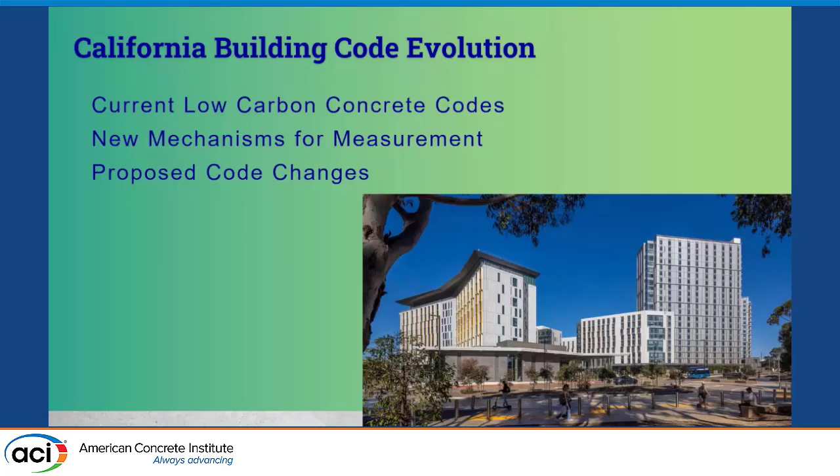It all started a long time ago in 2019 with the Marin County Low Carbon Concrete Code. This was put together by a group of folks up in Marin County and the California Bay Area. They looked at what was being done in their jurisdiction and wanted lower carbon concrete. When this happened, we really thought the sky was falling. We thought this was the end of the California concrete industry. There's no way our industry can live with rules like this.

We went up there and testified, please don't do this. You guys don't understand cement. You don't understand concrete. You don't understand the logistics. They went ahead anyway, and we were really concerned.

So things in this code: they have options to comply with a low carbon limit by limiting the amount of cement in your concrete. You can also comply by submitting an environmental product declaration talking about the GWP in your concrete. You can comply on a mix-by-mix basis, or on a project-wide basis - today we'd call that a carbon budget. They also allow that if you have cement from a plant lower in carbon than the national average, you can scale up the amount of cement you use by that similar ratio.

In the intervening 6 years, I'd say they did everything we would ask anybody to do. I don't know if they knew it at the time - I don't think we knew it at the time - but it actually works really well. The cement limit looks odd; the reason is that in 2019, when they were contemplating this low carbon code, there were no concrete producers in the entire county that had the ability to generate an EPD for concrete. But they said, hey, we want low carbon concrete anyway.

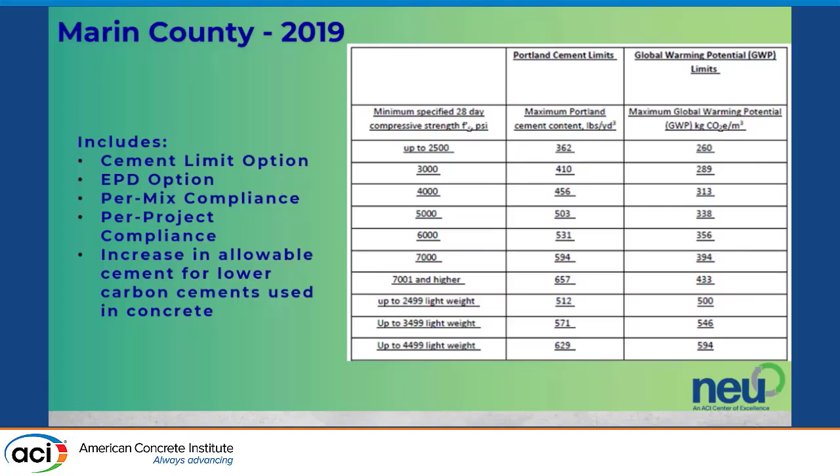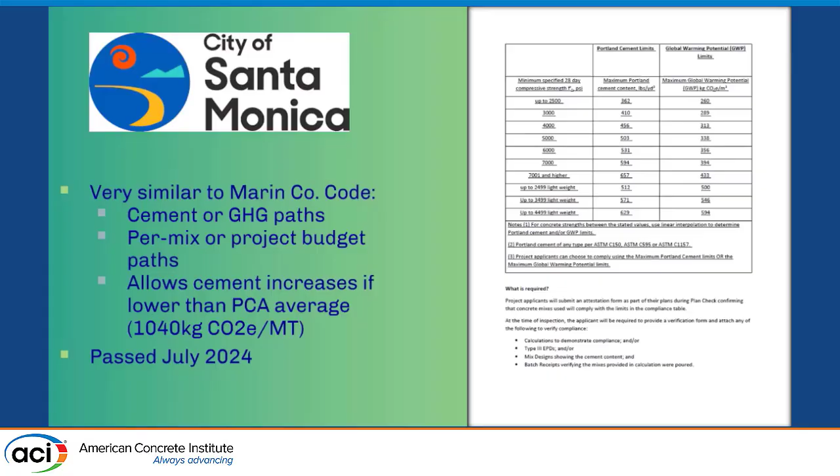In the intervening years, their homework has been copied by the city of Santa Monica - if the values in this table look familiar, it's because they're identical. It's also been copied by the city of Dublin, also up in the Bay Area. They added a little stick to theirs: if you don't comply, you owe them $190 per metric ton of excess embodied carbon. So that's kind of fun.

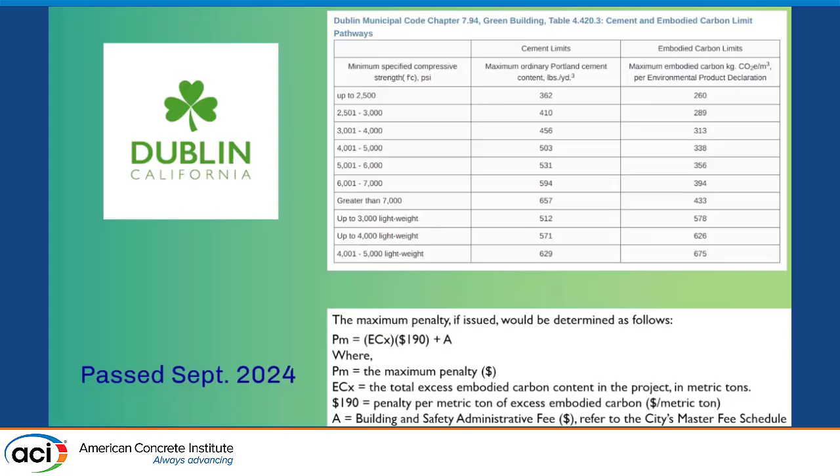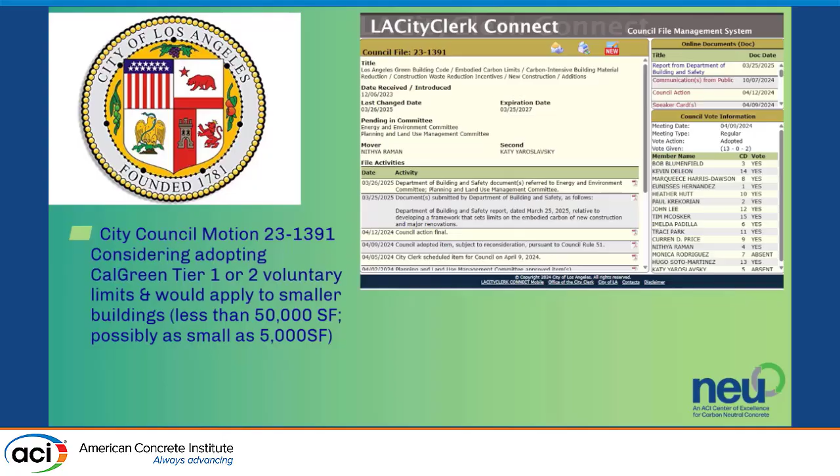We don't have action yet, but the city of Los Angeles is contemplating some kind of low carbon concrete code. They are not talking about copying the Marin County code, though. They are talking about copying some aspects of the CalGreen code, which I'm going to come to next.

CalGreen Code is the law of the land in California. It's part of the state building code. It went into effect July 1st, 2024, and covers non-residential buildings over 100,000 square feet and school buildings over 50,000 square feet. Part of the implementation plan was that this will extend to all non-residential buildings over 50,000 square feet in January.

It offers 3 different paths for compliance. If you're going to remodel an existing building, you have to reuse 45% of the structure. If you're going to take a prescriptive path, you have to be under 175% of the NRMCA industry average carbon values.

Our industry did not lobby for that, right? Lower your rifles. The 175% came from officials at the state government, and we said, really? 175%? And they said, yes, we want to put a stake in the ground that we know everybody can achieve. And we said, man, you could make concrete in a wheelbarrow that does that.

And then the final path is a whole building LCA path, wherein you model - did my slides change? It's animating - you model a building similar to what you want to build and then demonstrate that your building is 10% lower than that.

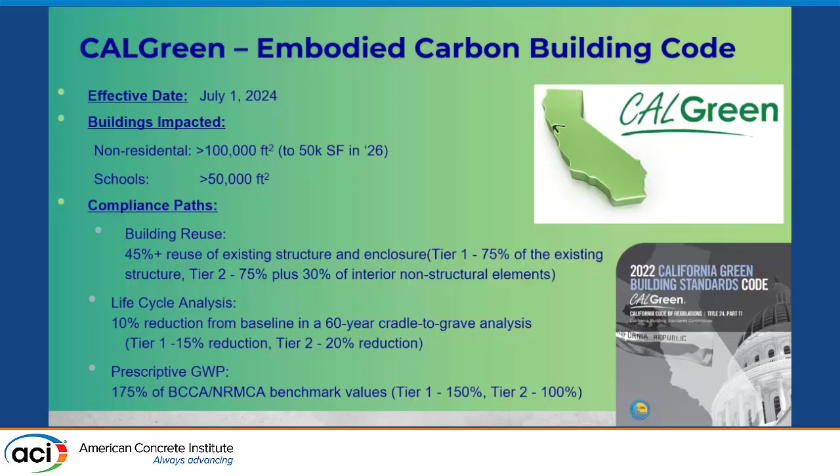Full of tables like this that talk about the embodied carbon limits for various building materials like steel and concrete, higher strength concrete and things like this. It also pulls in values from the Buy Clean program.

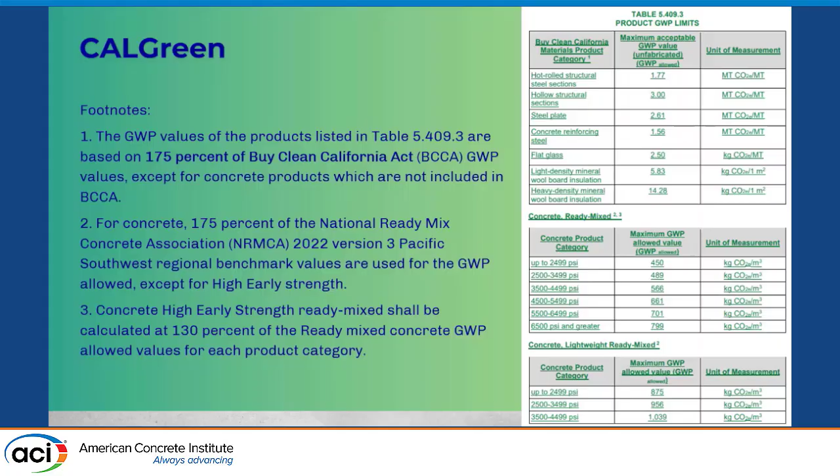I didn't make a slide on this, but let me clarify something I've only recently learned - not everybody outside of California understands this, and it's easy to see why. California does have a Buy Clean program. It's only for state procurements - GSA buildings, Caltrans buildings, etc. It does not cover concrete. It covers steel - plates, shapes, bars, rebars. It covers flat glass, and it covers mineral wool insulation. As the concrete industry, we tend not to talk a lot about Buy Clean because it doesn't really affect our industry, but it does exist. I just wanted to clarify that.

We also now have ACI 323, ACI's own low-carbon concrete code. If you're interested in learning more about this, or just shouting at the people who wrote it, at 11 o'clock this morning, straight downstairs from here, is the 323 committee meeting. So come on out and tell us what idiots we are.

One thing we need to recognize when we talk about all these building codes we've looked at so far - kind of everything in place in California - is that what we're doing is comparing old concrete to new concrete. And we can do pretty well when that's the comparison being made. Hey, five years ago we were doing this, we've made an improvement, and now we're here, right?

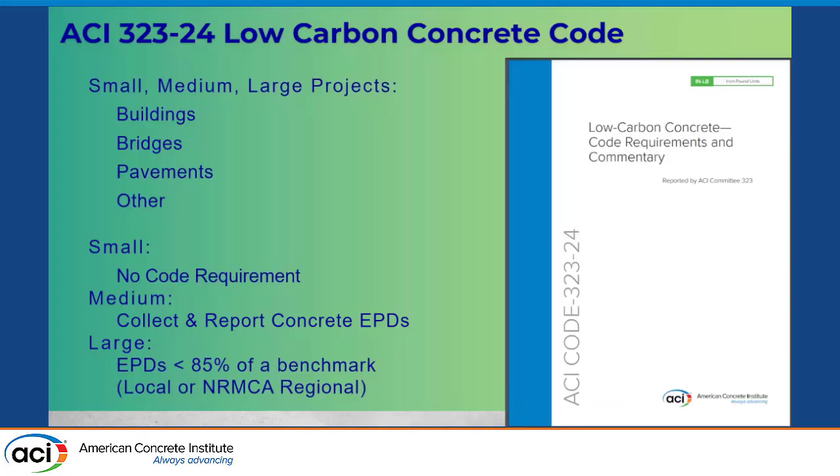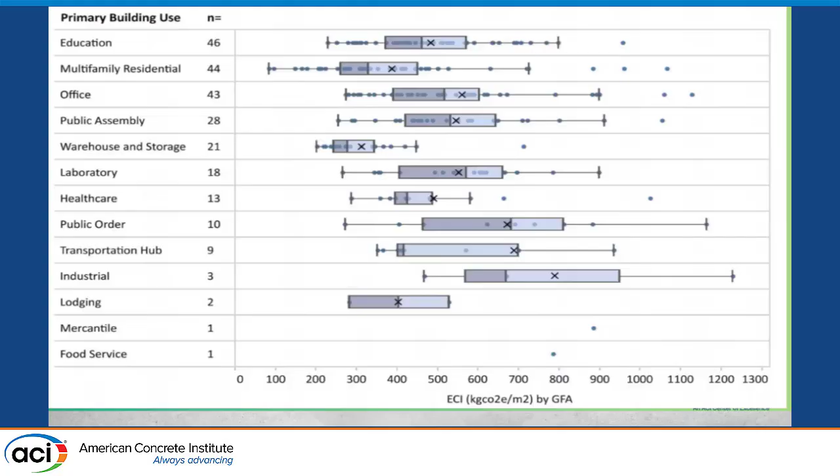Does everybody recognize that? What if, instead of talking about our individual building materials, we were looking at entire projects? What if we were signatories to the SE 2050 commitment and we were reporting the values of the buildings we put up to SE 2050, and they were developing reports with tables that look like this? We're talking about what kind of buildings are being made, what the embodied carbon is in terms of CO2 per gross floor area.

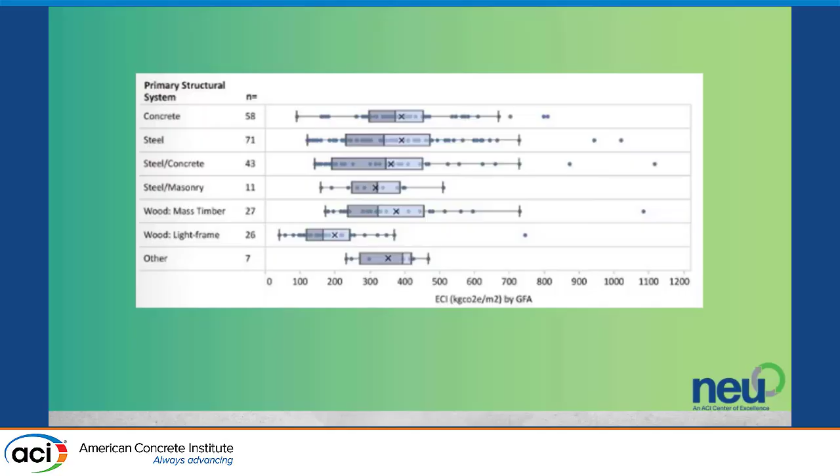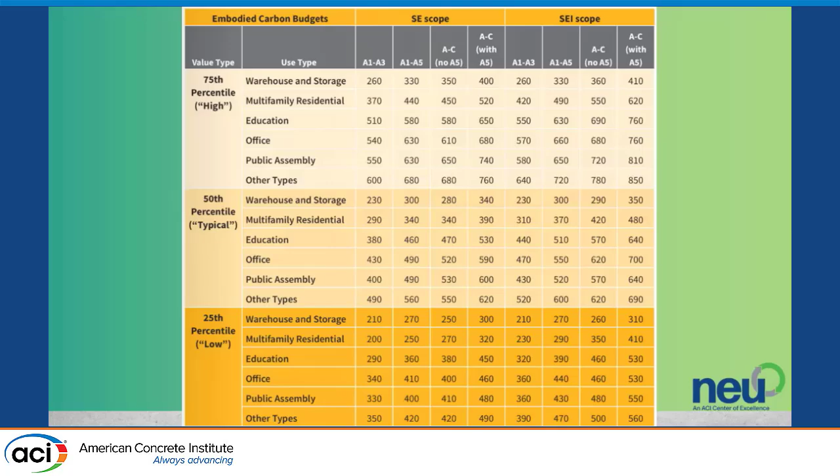We would talk about what kind of materials are contributing to those embodied carbons on building area. What if we were the Carbon Leadership Forum and we were going to put out guidance on what those values should be? What if the American Society of Civil Engineers were to come along and issue a pre-standard for assessing the embodied carbon of structural systems for buildings, last month?

And then what if you were the American Institute of Architects California group and you said, you know what, CalGreen, we love what you've done here, we'd like to make some changes. We've got that 175% of industry average - we're not in love with that number. What if we lowered that to 125%? And what if we had - there are some potential voluntary tiers that nobody has implemented so far, but they do exist. What if, instead of that performance path where we modeled an entire building and showed that ours was less, we just put some of those numbers in there?

Storage buildings need to be less than 480 kilograms CO2 per square meter. Education and business, 660. Other buildings, 750. And we just said, hey, don't model two buildings - model the building you want to make and show us that your building is less than that. And then they wanted to include site concrete, anything over 5,000 square feet. And we said, that's fine.

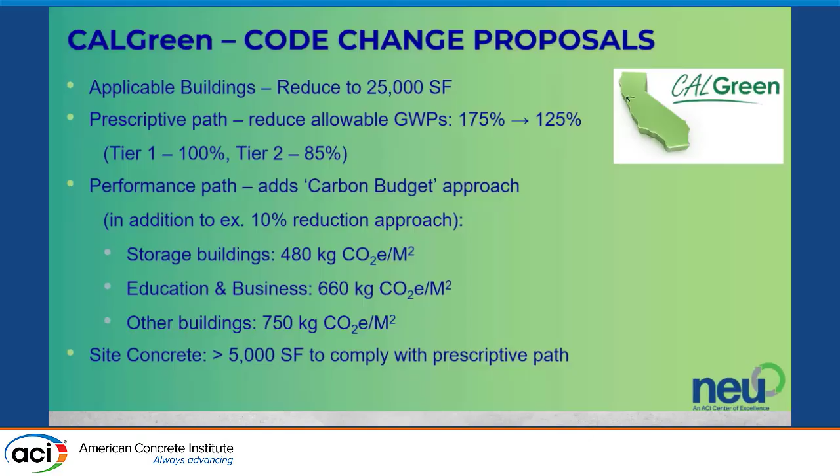In the midst of all this negotiation happening with AIA California, the Building Standards Commission, and the cement and concrete industry - myself, folks from NRMCA, etc. - along comes Assembly Bill 130, a very well-intentioned piece of legislation designed to streamline the rebuilding of residential properties in the wake of the wildfire disaster California saw in January and has seen several times in recent years. We have 25,000 homes or so that have burned and need to be rebuilt.

And what this legislation was meant to do - you don't need to read this whole thing - what this legislation was meant to do is stop local agencies from putting additional roadblock requirements in the way of these homeowners trying to rebuild after a disaster.

Local jurisdictions were saying, hey, in addition to that building code we have, what if you included all electric appliances? What if, in addition to that code, you were mandated to put solar on your roof? What if, in addition to that existing building code, we said you had to have fire sprinklers in your house? Maybe not the worst plan, given the reason they're rebuilding. But all of these things were adding burden to those property owners.

And so they came along and they said, enough, the residential building code is locked for 6 years. And we said, that's fine, didn't think much about it. We're talking specifically non-residential buildings when we talk about Cal Green, right?

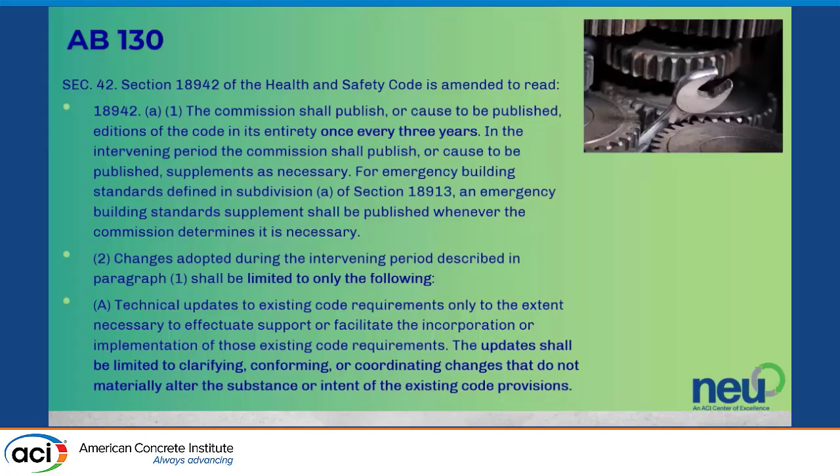Well, buried in this is this little provision: the updates shall be limited to clarifying, conforming, and coordinating changes that do not materially alter the substance and intent of the code. What's that mean for Cal Green? It means everything's out. That means there are no changes. That means that all of this stuff on the Building Standards Commission slide is held for further study.

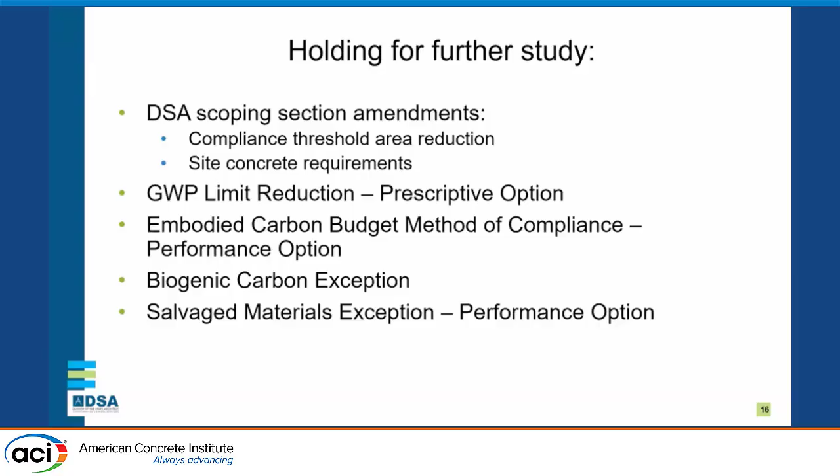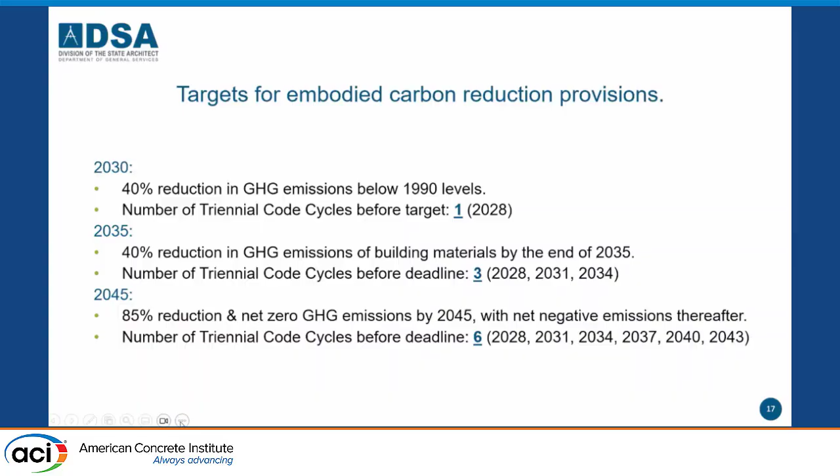So, in a sense, a temporary reprieve from reduced carbon requirements on concrete. However, this is a bit of a double-edged sword, because as the DSA recognizes, there is one triennial code cycle between now and the 2030 mandates at the state level to have a 40% reduction in GHG. So now, instead of potentially a series of step downs in the intervening code cycles, we may be staring down the barrel of a very large change for the 2028 building code, which will be coming up next. That remains to be seen.

While all this is going on, we have two other laws, Assembly Bill 43 and Assembly Bill 2446, that mandate that the California Air Resource Board develop a framework for measuring and reducing the average carbon intensity of the materials used for the construction of new buildings, 40% reduction by 2035. CARB is working on exactly how to do this now.

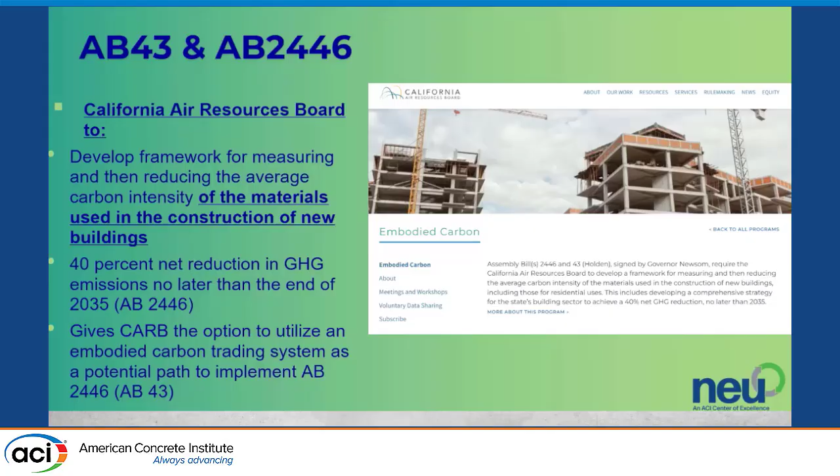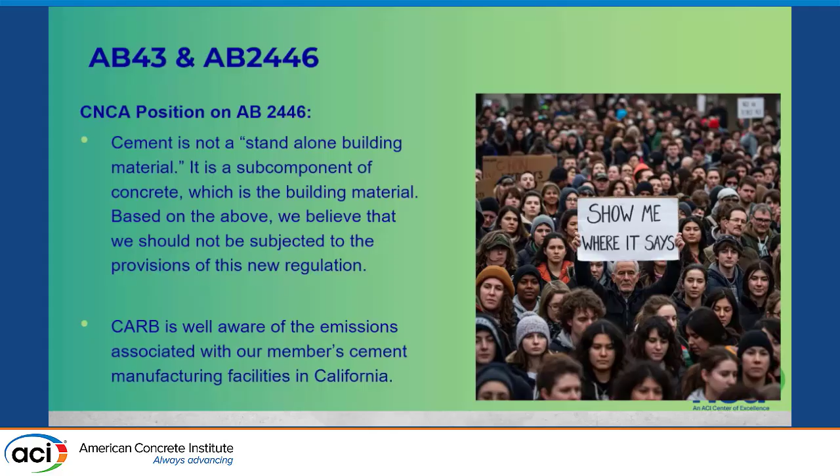I said I wasn't going to talk about cement much, but I have one slide here on cement. We went to CARB and we said, we don't think cement is a material for the use in the construction of new buildings. Concrete is. Or in other words, show me where it says that. And we think that the Air Resources Board sees it our way. We have heard from them informally that cement will not be a regulated material under this program. Concrete certainly will be, and all of the other building materials certainly will be. It remains to be seen exactly how that's going to shake out.

CARB is currently working on establishing a baseline, right? They are charged with identifying what the carbon footprint is for buildings, for all buildings, right? They need to understand for any building in the state, existing or proposed or to be built, what will be the carbon intensity of that building? How will building material manufacturers report their data? How will construction projects report their data? All of these things are up in the air.

We early on heard some very, very concerning things from the California Air Resources Board about reporting on the manufacturing front. They said, well, we think that the manufacturers, like the ready-mix people, for example, should report the revenue associated with those materials. And we said, hard no. You're not getting revenue data from a ready-mix producer. I see some in the room. Katha, you want to tell the Air Resources Board how much money you make selling concrete? No, thank you. And we said, hey, you guys need to stick to, don't worry about the revenue, we're not going to do that.

You need to stick to environmental product declarations. And they said, well, we don't know about EPDs. We don't know about some of the background data, the primary data that's used. Some of that's pretty old. What if you only used CARB-approved data? What if your EPDs were only good for 2 years instead of 5 years? So we continue to lobby this.

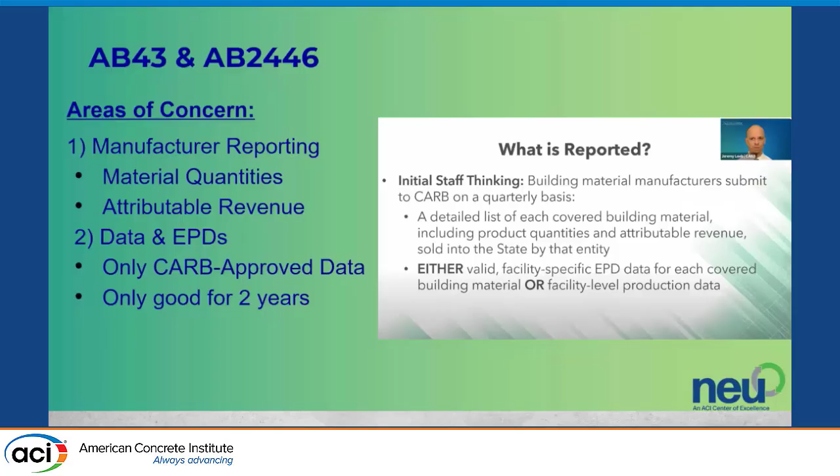If anybody's really bored and really worried about it, you can tune in Thursday morning, live at 9 a.m. in Sacramento, where I'll be, meeting with the California Air Resources Board on this reporting.

This is what the rough path looks like. They're going to work on establishing their baseline this year. They're going to start working on that reporting mechanism this year. They're going to be collecting data and tracking progress, et cetera, et cetera.

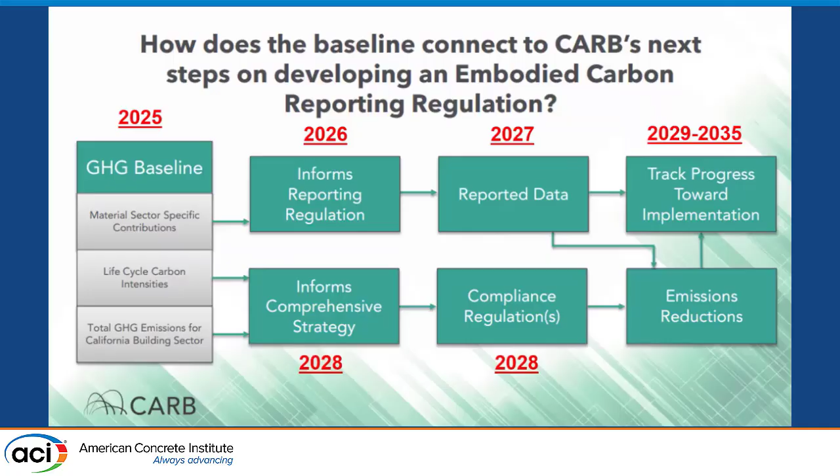That's all that I have for you today, but I'm happy to take any questions on this. And if you've got any burning questions about the California cement industry, I'd be happy to try to address those as well, even though I didn't talk about them here.